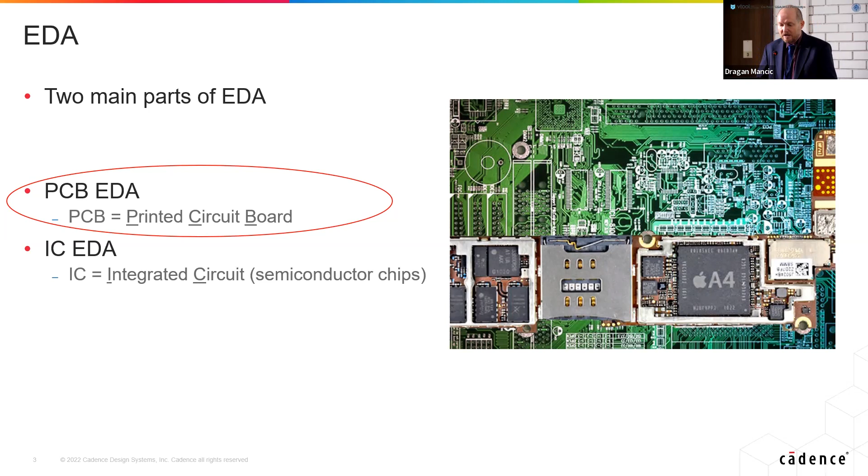And then there's the IC, the integrated circuit. This is something which is inside these black rectangles. And now if you remove the package and zoom in, so because in real life what you see here.

This is 1 square millimeter, 2 square millimeters, so very, very tiny. And if you zoom in, you find there are millions and billions of small devices inside. So now some software needs to be created in order to place these devices, to connect these devices, to verify these devices that they are all working properly under different conditions, so different temperature, different voltage. So there are a lot of challenges to be accomplished till a chip is ready to function.

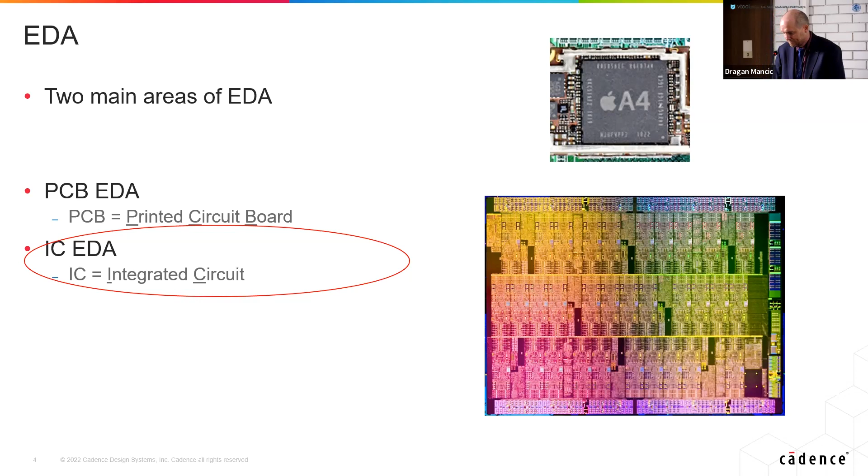So I would like to go with you quickly through the VLSI design flow. VLSI stands for very large scale integration. There are different stages. The first stage is the system specification, then we have the architecture, then the functional design, synthesis, physical design, fabrication, and then finally packaging and testing. So now let's go step by step.

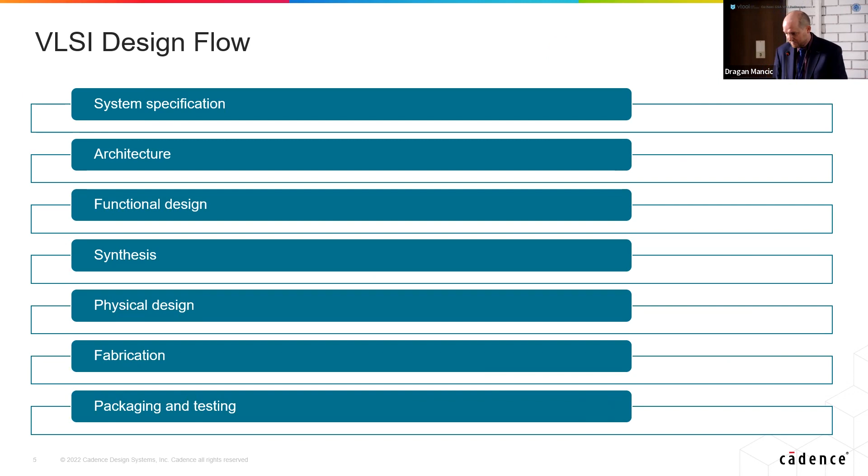For example, we want to create a system, and the system can be as simple as a wristwatch. First you start with the system specification, so what this wristwatch should do. It should display time, it should set alarms, it should have a stopwatch, and also very important, what is the maximum cost of this design, the maximum production cost.

Once this specification is done, for this you don't need Cadence software yet, this can be done with a Word document or PowerPoint or Excel. But then you go into the architecture. So then you must understand, for your specification of a system, what kind of architecture the system should have. It should have a plastic band, it should have a display, it should have control buttons, and then also it should have some kind of chips inside of it.

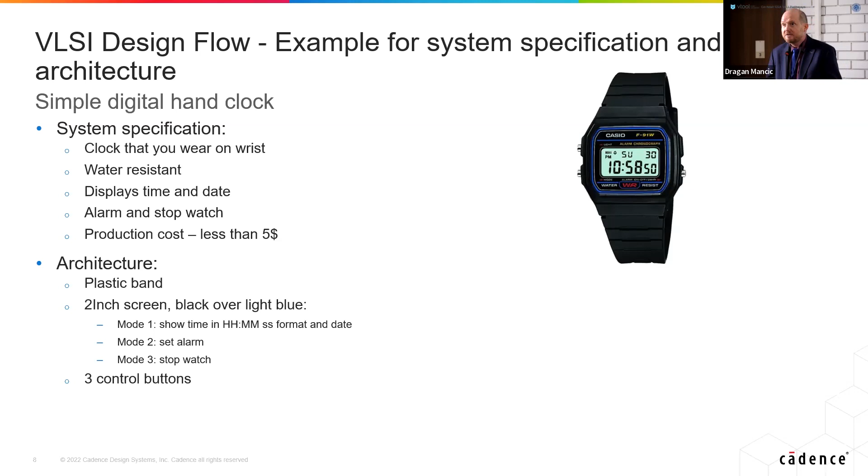Okay, so now you have this specification, it's also called RTL, register transfer level. And now there's a step which is called synthesis, and the synthesis step converts this description into a so-called netlist. The netlist contains standard cells, and these standard cells are the basic logic, for example a NOT, an AND, a NOR, or an XOR. So now the synthesis tool converts the Verilog description into this standard cells description.

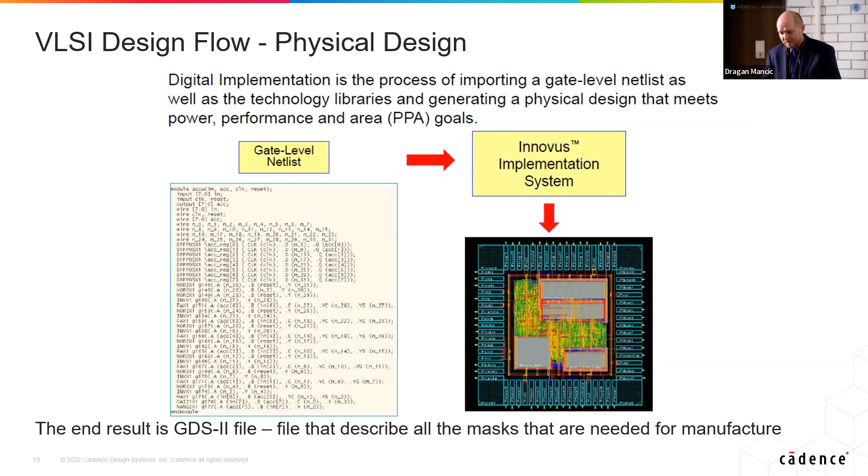So how does it look like? On the left side, on the top, this is how a transistor looks like in a tool which we call Virtuoso. This is a tool for analog design in Cadence. You see the green line, this is the gate, and the blue lines, this is source and drain.

On the right side, on the top, if you cut a chip vertically, you see these are the different layers. On the very bottom you see the transistors, and the blue shapes are the vias, which are the connections between the different routing layers. Then the purple layers are the metals.

During manufacturing, step by step, every one of these layers is created, and there are several steps needed to create each of them. But today in the afternoon there will be a lecture about the manufacturing.

After this has been done, if you zoom in very closely, you see the picture on the left bottom - this is how a transistor looks like on a chip. You see the gates, the source and drain, and the size of this structure is maybe 100 nanometers or even 50 nanometers.

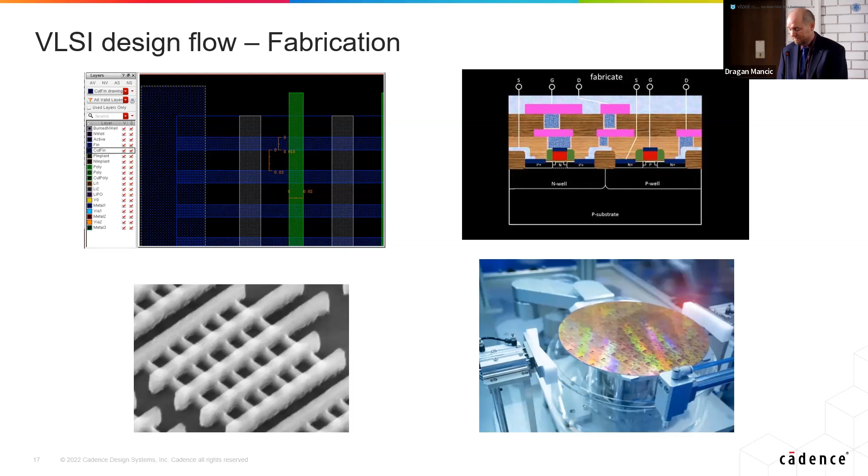Here are package examples, these are different packages for different requirements. Basically, a chip needs to be put into a package, and there can be several chips in one package - it's also called system in a package. This is becoming more and more important, so if you want a secure job in the industry, you can do package design. There's a large need for package designers.

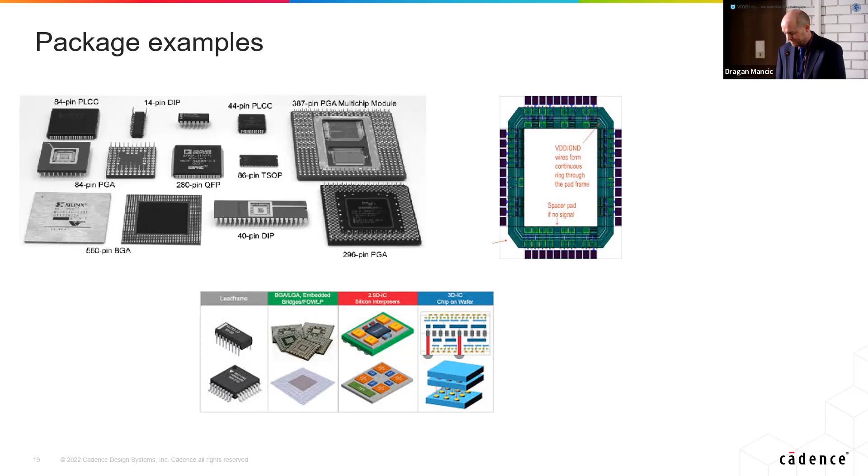Chip design is very complex. You can compare it with the design of a modern plane, but the challenges are completely different. Usually for designing a plane it's like 10 to 15 years, but for a chip you usually have about 1 year for designing it.

For example, take a smartphone like an iPhone - every year there's a new model that comes out, and every year there's a new processor in it. So basically every year the engineers at Apple have to design a new processor, and they usually do it in a new technology.

Basically every 2 years there's a switch in technology, from 20 nanometers to 16 nanometers to 10 nanometers to 7, 5 - the next step will be 3. Every technology also requires new tools and new software, because there are always new effects that need to be taken into account to ensure the chip is working. So designers always need to learn about new tools, and once you're finished with your chip, you immediately start working on the next generation.

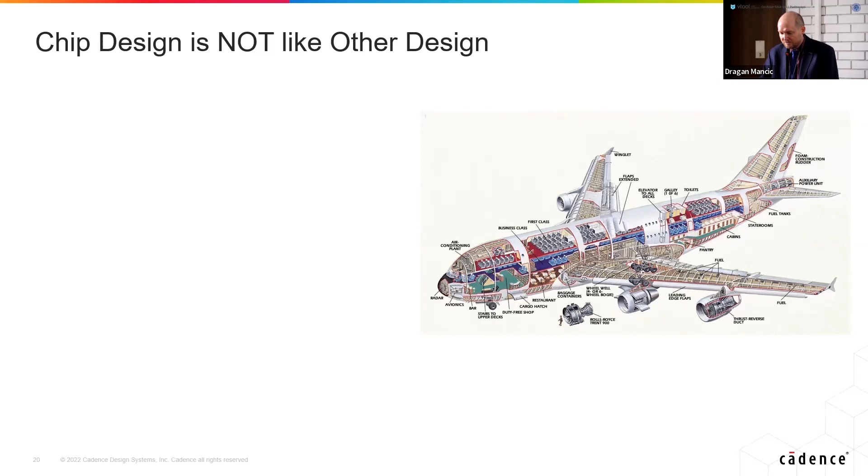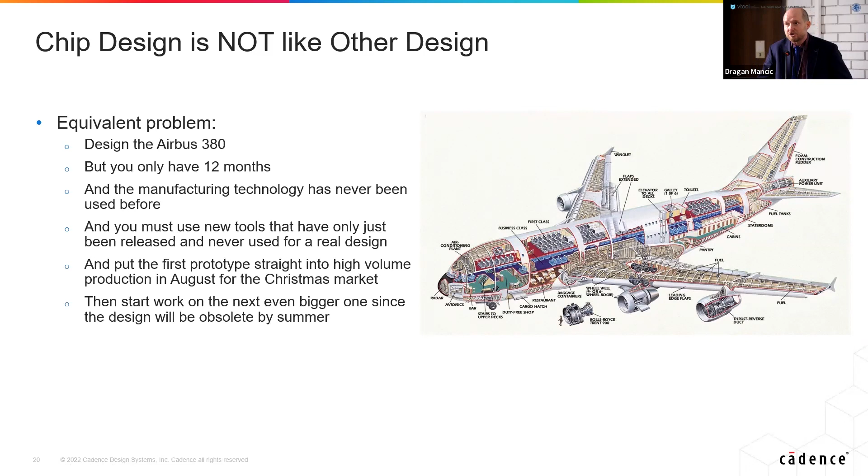Why is it the case? Because a software bug is easy to fix - you find it, provide an update, and everyone is happy. With a chip, if it's already built into a system and sold, getting a new chip to replace it is very expensive. Car manufacturers, for example - if there's an error in an automotive chip, getting all the cars back to manufacturing to replace the chip is a huge cost. Therefore, it's very important that a chip doesn't have any errors before it goes into fabrication.

Therefore, there are many different ways to verify a chip, different approaches. There's formal analysis, digital simulator analysis, and even hardware which accelerates the execution of your Verilog code in order to find errors. If you have a processor, you can already start your operating system on a processor which doesn't yet exist - for this, you need these accelerator boxes.

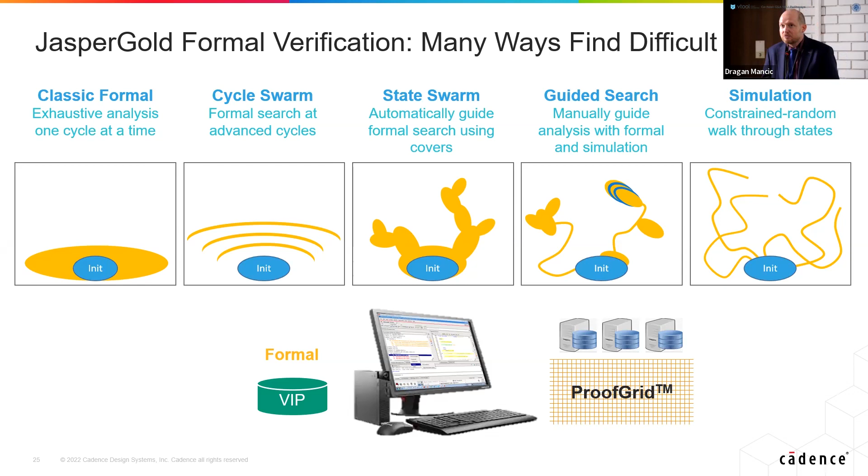First, what we did was supervised learning. There were many designs available, and our engineers labeled them - which design fits which algorithm. Then there was a training phase, and the software could recognize which algorithm to use for converging and for the proof for a given design.

The second version of this software used reinforcement learning instead. Now the software starts trying out on a particular design which algorithm is the best fit, without any labeling. Using reinforcement learning, we got even better results. So this problem is solved now.

The other problem we have is regression. Regression basically means you have a set of verification tests, and every time you change something in your design, you rerun these tests - this can be thousands and tens of thousands of tests. It always takes a lot of time, compute power, and software licenses. So the question is, how is it possible to minimize and optimize the number of regression tests?

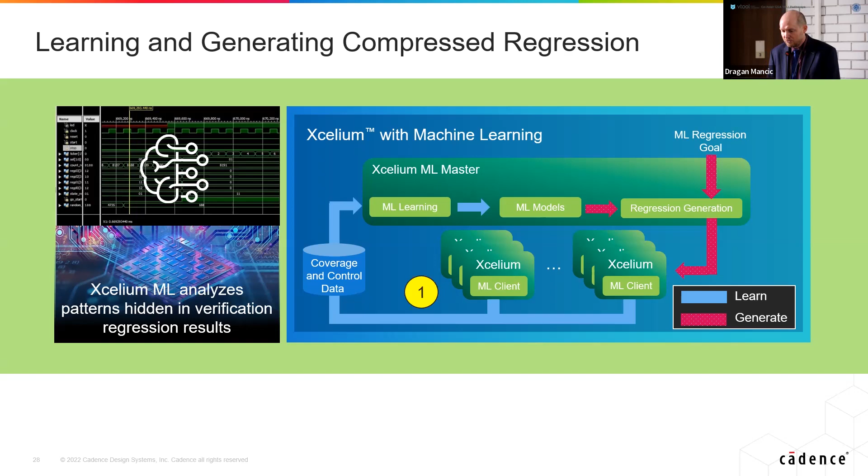This is something we also use machine learning for. Our machine learning algorithms go through all the regression tests and suggest which ones are basically the same so they can be removed, and also how to optimize the regression tests so that they cover more cases.